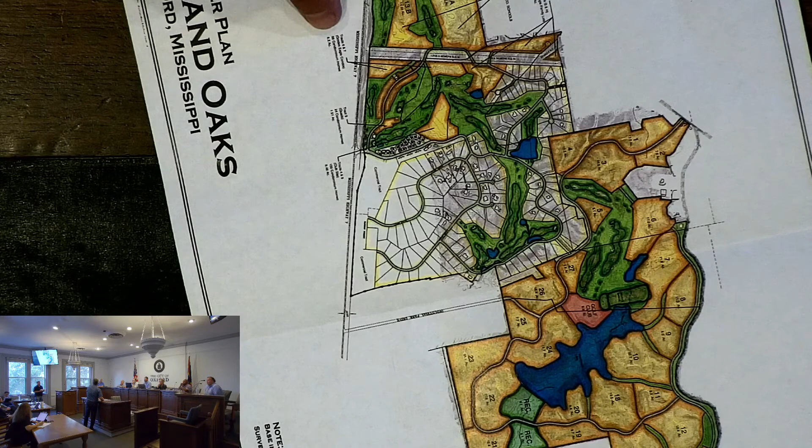The project on the east side of Augusta, that's basically here, that was constructed as quadplex condominium units. This side that we're talking about today was also originally intended to be the same type of units, quadplex condominium units. There's a little note here that you'll never be able to read on this overhead, but it says 96 condominium units was proposed.

This is a set of plans that our firm actually did, back in 2006, right at the end of 2006 these plans were developed. Again, sister project to what's across the street, these were proposed as quadplex condominium units. I believe this is indicating 52 of those units.

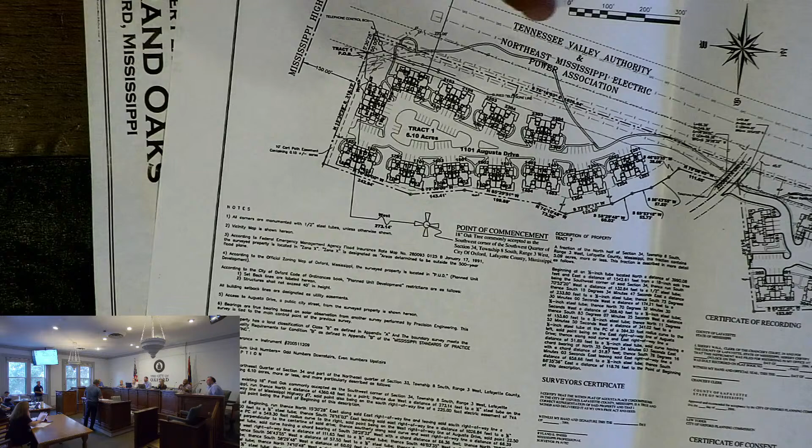So to answer your question, Mr. Sprague, this is essentially the same access point that we're talking about today - the exact same access point. And I know there's just one in and out. There's not any way to have a separate construction entrance, I assume, during construction either. There's not a convenient way to do it.

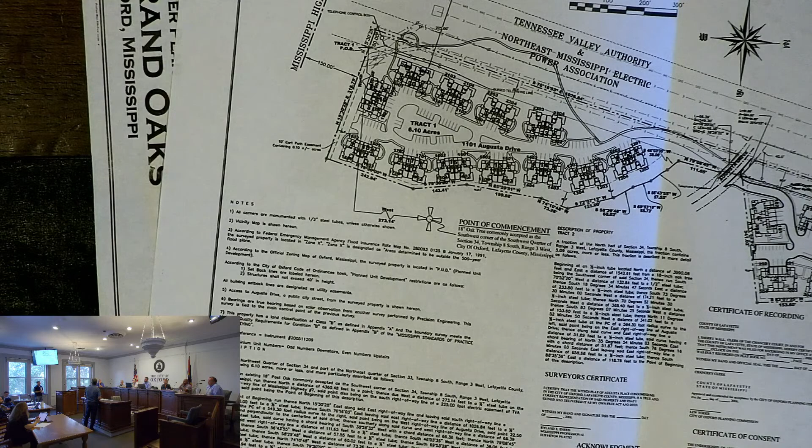And the same - before Rosemont was approved, there were 107 homes on Augusta Drive. Every home in Rosemont was built by hauling lumber, shingles, and every other bit of construction equipment and materials up the same stretch of road. Homes in Rosemont would not be there if they hadn't accessed Augusta Drive the same way the Walkers are proposing to do here. There's not a convenient way to make a construction entrance. And they don't own any property that fronts on another street.

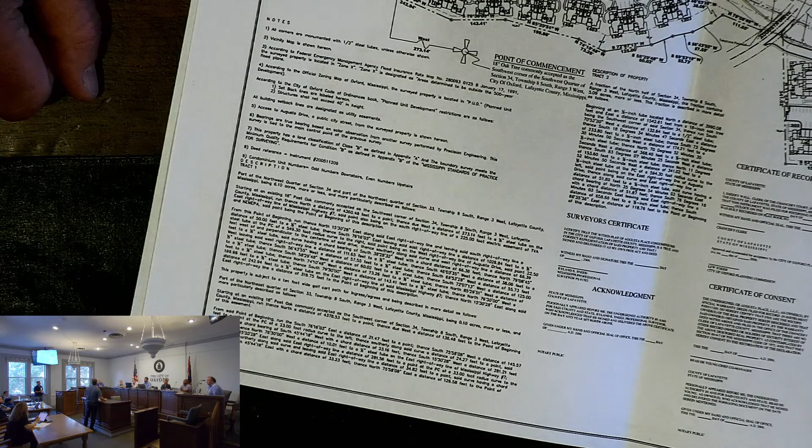Highway 7 is on the backside, but there's no access right over there. Really no way to get permission from that side.

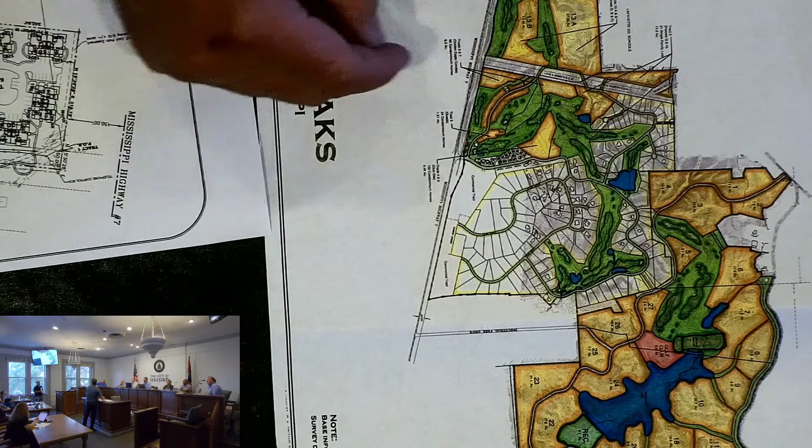Paul, currently Augusta is one way in, one way out, but part of the master plan is for that to link up eventually, is that right? Well, that's right. In fact, this same map - we'll get back up here. So, of course, this is Augusta Drive as it exists now, up into the Rosemont area north here. This is also Augusta Drive that comes up, moves back around and has been constructed to basically right there.

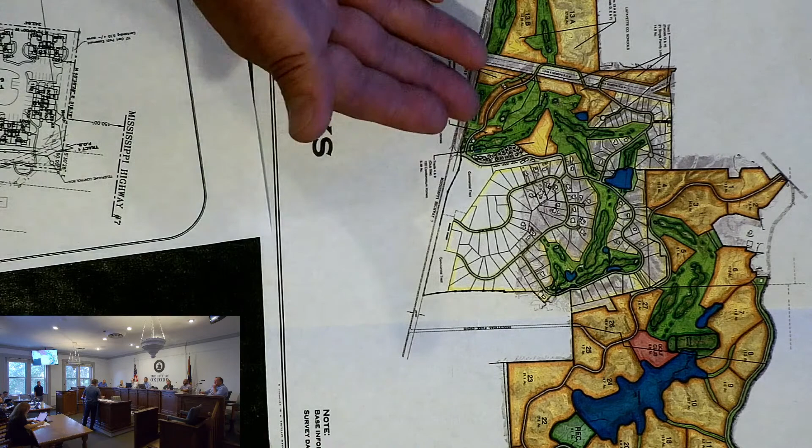But yes, as this drawing indicates, we actually worked with Bernard Johnson, who owns some property over there on that end of Augusta Drive. He recently got a plat approved, sitting basically right here. And even as part of that plat, the city made us show what has been shown for more than 15 years, which is the interconnectivity from Augusta Drive on the west side over to Augusta Drive that's already been built, just about to the power line.

In fact, this is the plat that we got approved - Johnson, that's at the end of Augusta Drive on the eastern side - and the city wanted to specifically have it on record that eventually this was going to be a roadway that connects from existing Augusta on the east over to this, essentially the same location right across from where the entrance to the development we're here tonight discussing will be. This connection will eventually happen. Our client does not control this property, but it's part of the master plan and it's intended to be built.

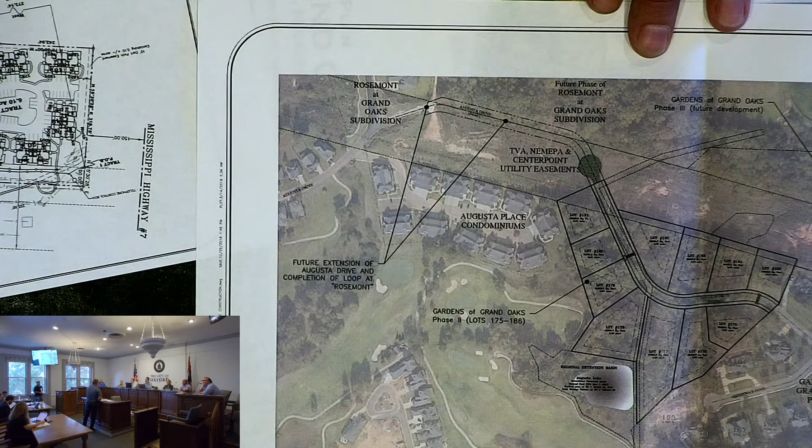So there's about 1,000 feet that isn't currently planned to be built, but is in the plan? That's probably a reasonable estimate, maybe around 1,000 feet. Okay, thank you.

Any other questions from the commission?

All right, ladies and gentlemen, first, just to prove to you that I read all your emails, I'll summarize the issues I got. Most of them were related to traffic in some form or other, but that included several different concepts: the width of the street, the prevalence of on-street parking, relatedly emergency access, the number of new trips that would be generated by the condominium development, lack of sidewalks along Augusta, children playing in the street, and lack of backyards contributing to that, and then speeding up and down Augusta.

I don't want to take away from any of your comments, but just to know that we did read the 13 or so messages we got from the community, and they've been put in the record. And if anybody from the audience would like to speak on this matter, please come forward, state your name and your address.